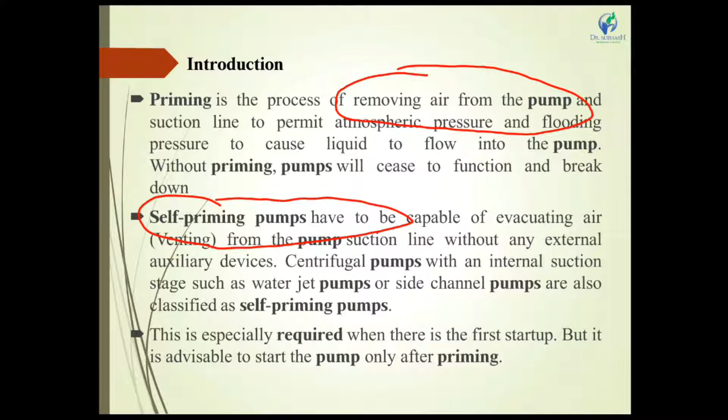Centrifugal pumps with an internal suction stage, such as a water jet pump or side channel pump, are also classified as self-priming pumps, meaning they require external sources to allow water to enter into the pump. This is especially required when there is a first startup, but it is advisable to start the pump only after priming. Without priming, we cannot start any type of pump at the first startup.

For all types of pump, considering the initial first startup, we require priming of the pump. Then after that it can self-prime and work smoothly. In a centrifugal pump, priming is required every time.

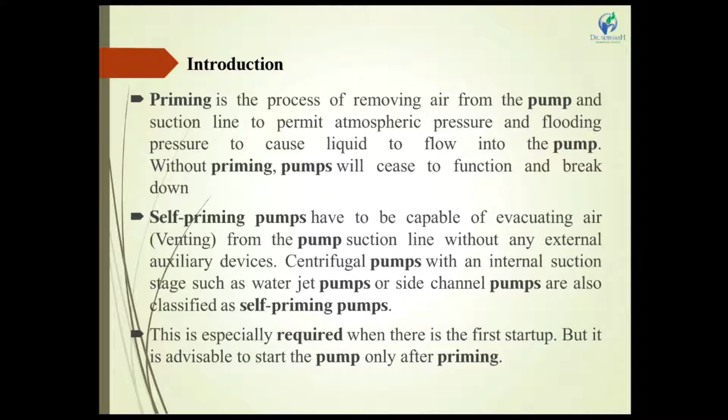The types of centrifugal pump priming methods are: pump with manual method, vacuum method, jet pump, and separator and bend.

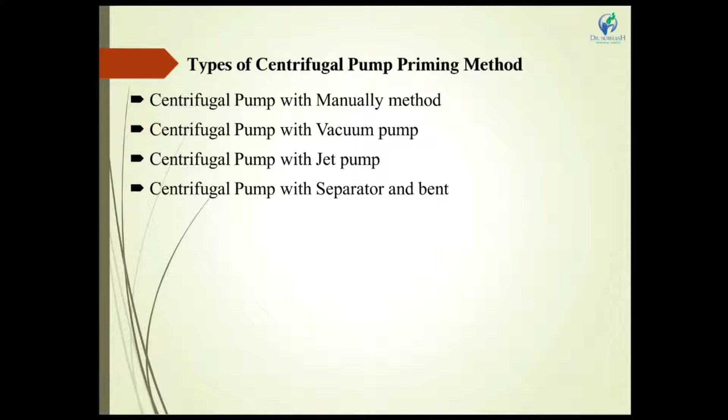This is the first method, centrifugal pump with a manual method. This is the suction line where the water enters into the pump. We have to remove air from the pump to the atmosphere; this is called the air vent valve. This is the delivery pipe where the water comes out from the pump. This is a funnel, through which we can enter water inside the pump. This is a small water vessel for adding water into the pump.

The main basic function is that for a smooth running operation from water inlet to outlet in a centrifugal pump, at initial startup it requires 70% of water filled into the centrifugal pump to create normal suction in the suction line. Below 70%, it's not able to generate a vacuum in the suction line, so it cannot work with a lower level in a centrifugal pump.

It's necessary to maintain a 70% water level inside the centrifugal pump, so it can easily generate a vacuum inside the suction pipe and suck the water from the suction line. Here we put one valve for priming of the centrifugal pump in the manual method, and this valve we have to close. In this method we add water manually by any external vessel to a funnel. This water enters the funnel and enters into the pump.

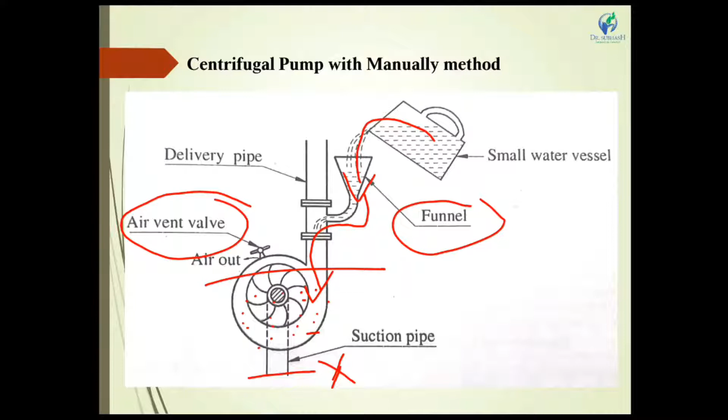Then after the water levels up in the centrifugal pump, at this time we also open the air vent valve, so the inside air can be removed from the pump. After this procedure, we close the air vent valve. Here is the suction valve. Here the air vent valve is closed.

We stop adding water, open the suction valve here and start the pump, so it can operate smoothly and allow water to enter into the centrifugal pump. This is the manual priming method. We can add water by any external vessel into the pump.

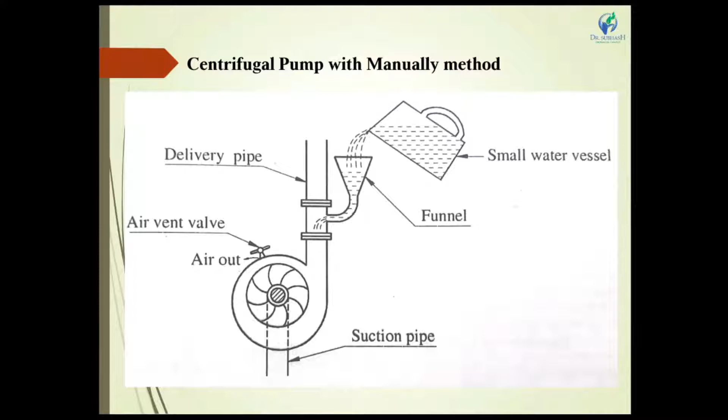The second method is the vacuum pump. There is no requirement for the air vent valve, because we add one vacuum pump connected to the centrifugal pump.

When we start the vacuum pump, most of the air is sucked and passes through the vacuum pump to the atmosphere. At this time, we have to close the delivery valve and open the suction valve to evacuate the air from the centrifugal pump.

Low pressure is created inside the suction pipe and water enters into the pump. When water comes out from the vacuum pump, we have to stop the vacuum pump and open the delivery valve for smooth running operation of the centrifugal pump.

Once it starts to suck water from the suction tank into the centrifugal pump, the centrifugal pump forcefully gives it out to the delivery line or discharge line. The vacuum pump we have to stop.

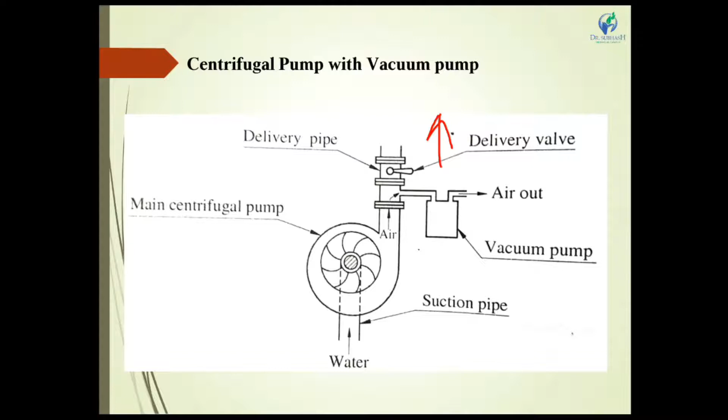The next is the centrifugal pump with the jet pump method. The jet pump method is normally filling water from the overhead tank. Here is the water at the bottom head tank. Here is the overhead tank, centrifugal pump, suction line, delivery line.

In this method, the pump suction line is directly connected to the overhead tank, and here we have to put an NRV valve, non-return valve or foot valve, for completely filling the line in the centrifugal pump.

Here the water from the overhead tank can pass in the downward direction due to gravity. It can pass by itself. You do not require any type of external pump to move water from the overhead tank to the lower head tank. It can pass by itself by gravity difference. This water can pass from the overhead tank to the filling tank at the nozzle.

Then this water arrangement makes a type of U-tube. Here I draw a U-tube, meaning there is a level of water filling the U-tube, so both sides maintain the same level. That's called a U-tube. Both ends are open to atmospheric conditions. If you add water in one limb, both sides maintain an equal level in a U-tube.

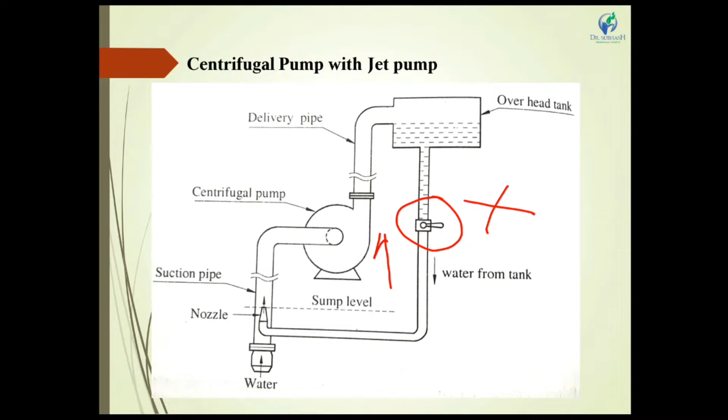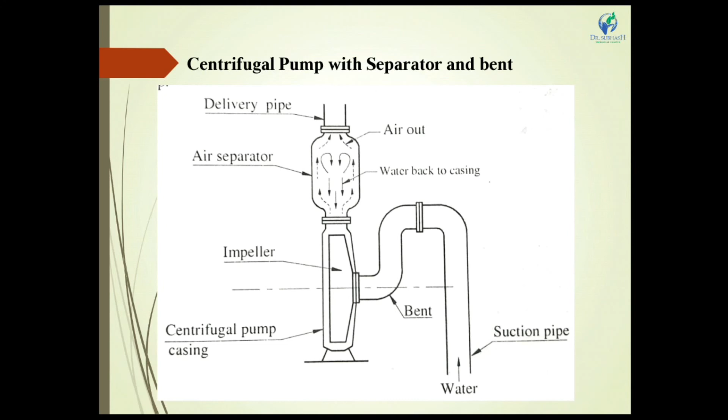Water goes out to the air separator, and due to gravity difference the water circulates continuously at this point, and step by step low pressure and vacuum are created at the suction line. So water can pass from the suction line to the casing to the delivery line for smooth running operation. These are all the priming methods of the centrifugal pump.